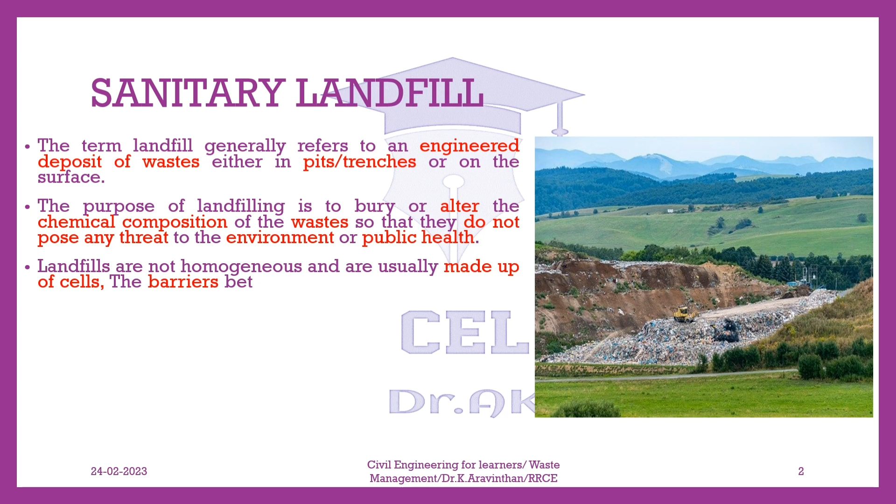Landfills are not homogeneous and are usually made up of cells. The barriers between cells generally consist of a layer of natural soil, clay, which restricts the downward or lateral escape of the waste constituents or leachate. Landfilling relies on containment rather than treatment for control of wastes. If properly executed, it is a safer and cheaper method than incineration.

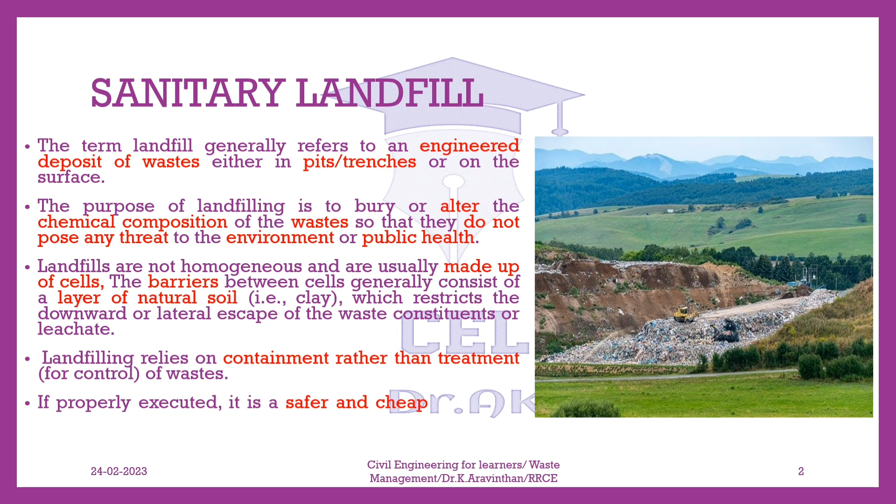The 4 minimum requirements for a sanitary landfill are: 1. Full or partial hydrological isolation. 2. Formal engineering preparation. 3. Permanent control. 4. Planned waste emplacement and covering.

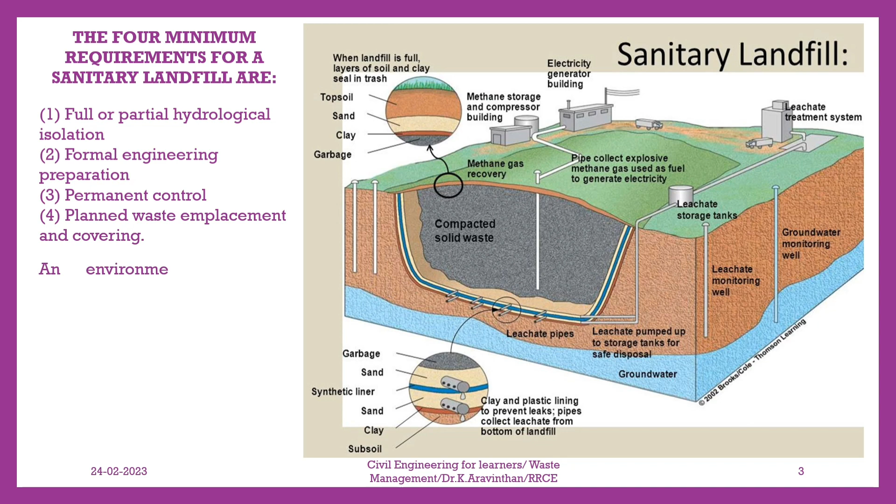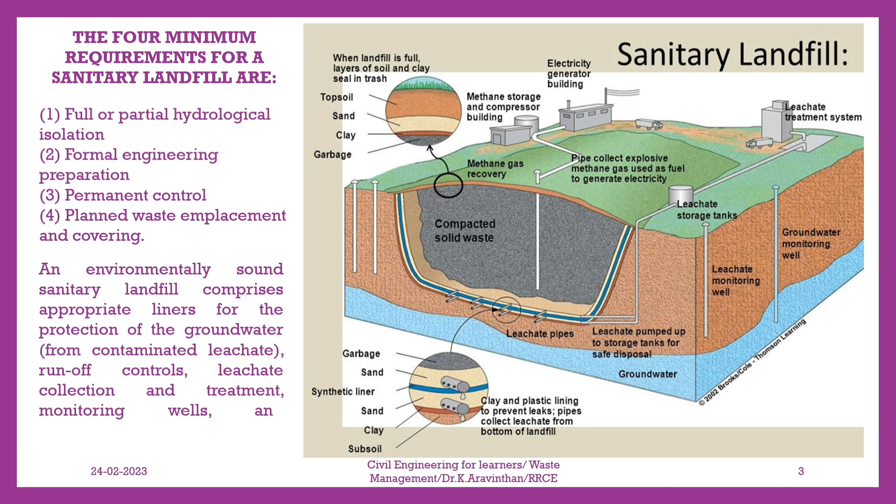An environmentally sound sanitary landfill comprises appropriate liners for the protection of the groundwater from contaminated leachate, runoff controls, leachate collection and treatment, monitoring wells, and appropriate final cover design.

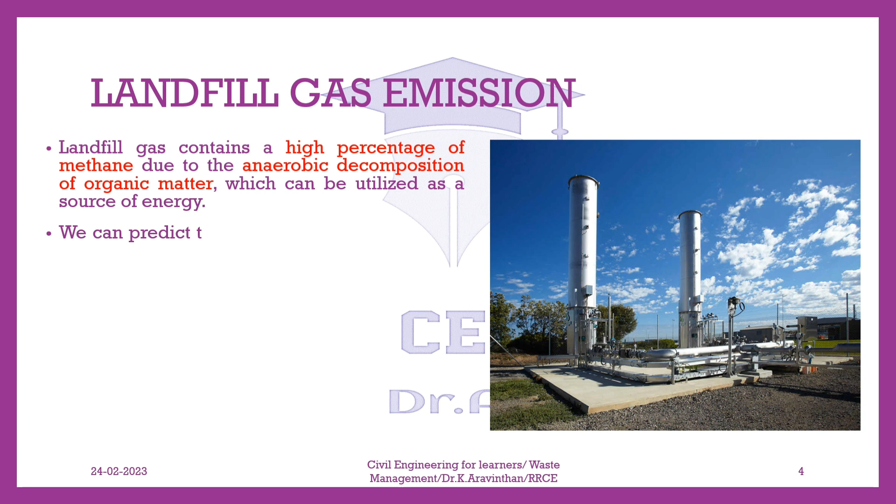Landfill gas emission. Landfill gas contains a high percentage of methane due to the anaerobic decomposition of organic matter, which can be utilized as a source of energy. We can predict the amount and composition of the gas generated for different substrates, depending on the general anaerobic decomposition of wastes added. Climatic and environmental conditions also influence the gas composition. Due to the heterogeneous nature of the landfill, some acid phase anaerobic decomposition occurs along with the methanogenic decomposition.

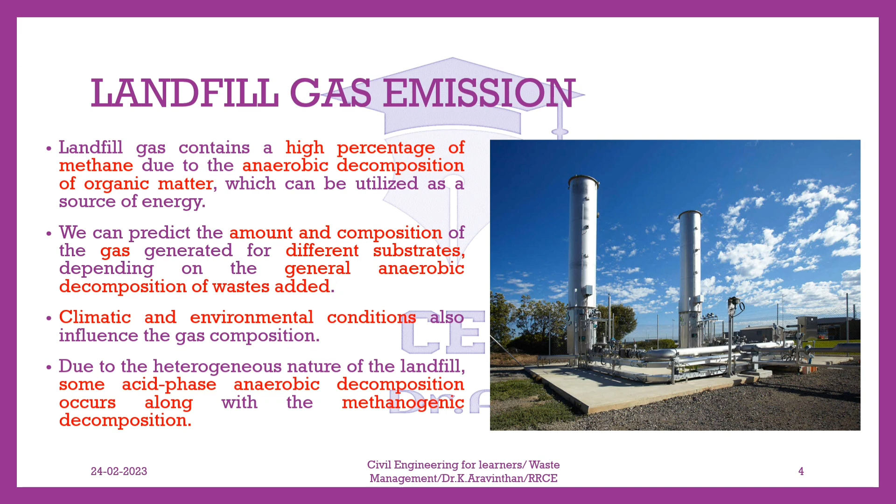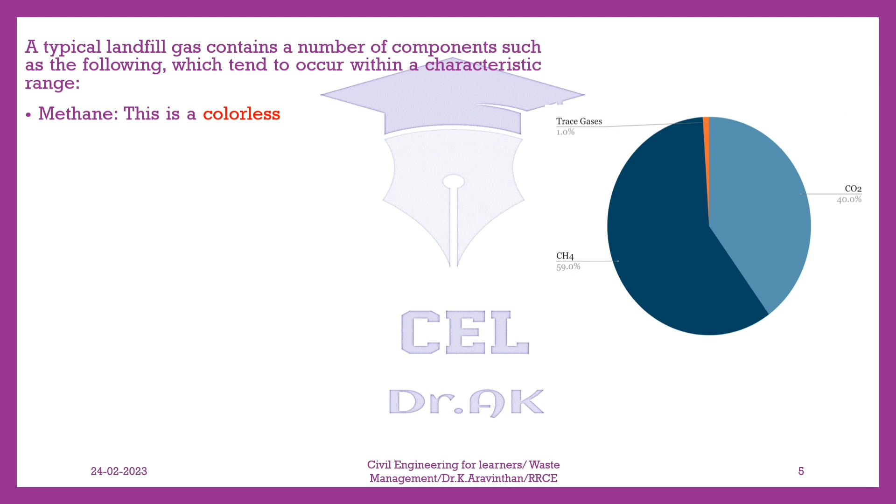A typical landfill gas contains a number of components such as the following, which tend to occur within a characteristic range. Methane. This is a colorless, odorless, and flammable gas with a density lighter than air, typically making up 50 to 60% of landfill gas. Carbon dioxide. This is a colorless, odorless, and non-inflammable gas that is denser than air, typically accounting for 30 to 40%.

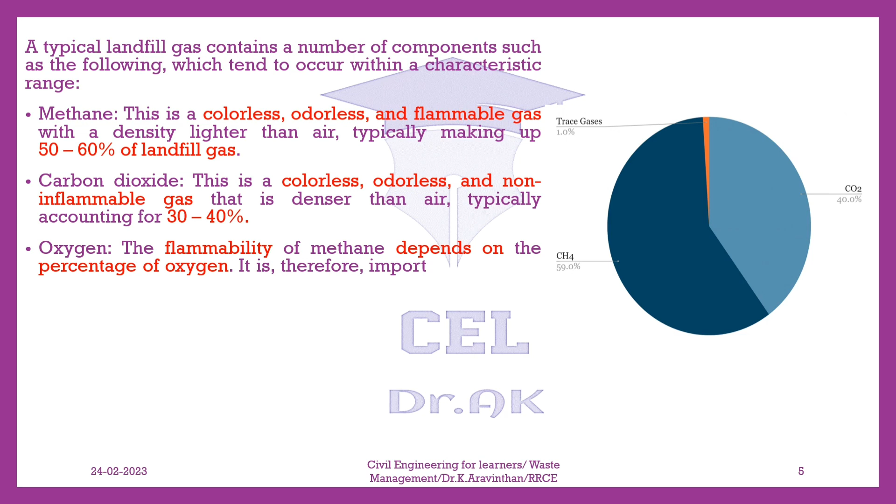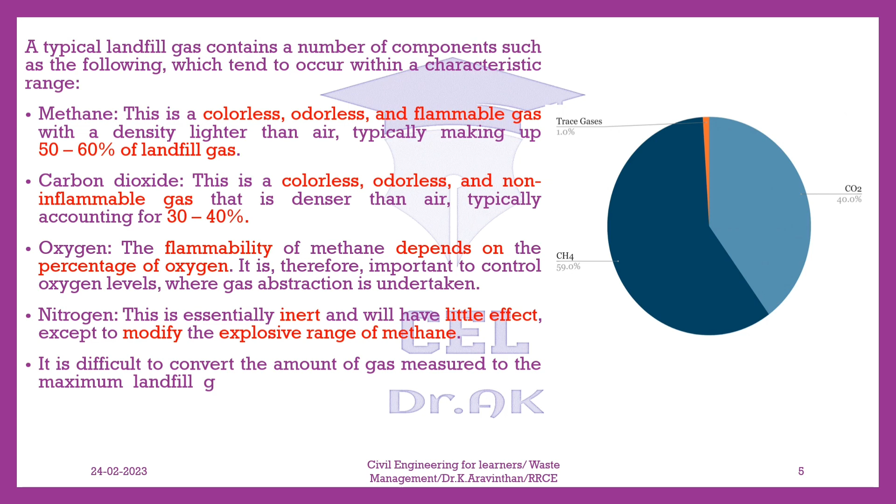Oxygen. The flammability of methane depends on the percentage of oxygen. It is, therefore, important to control oxygen levels where gas abstraction is undertaken. Nitrogen. This is essentially inert and will have little effect, except to modify the explosive range of methane. It is difficult to convert the amount of gas measured to the maximum landfill gas production value because gas is withdrawn from a small part of the landfill only, referred to as the zone of influence during measurement.

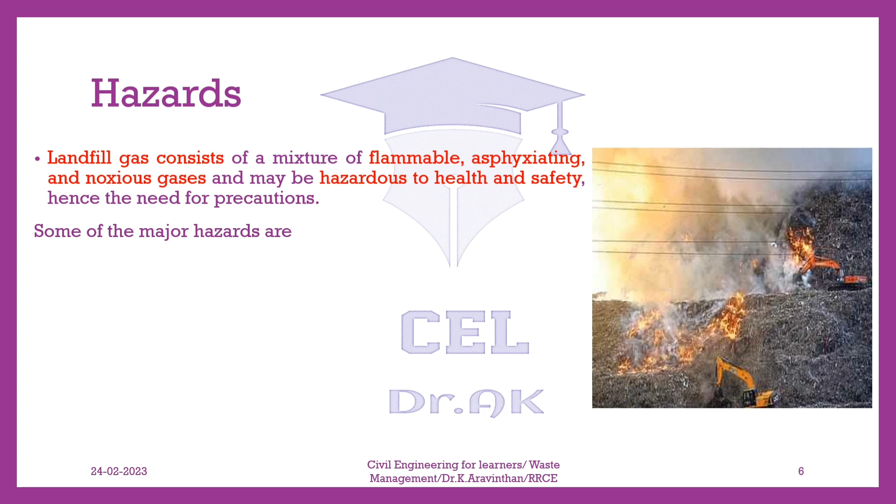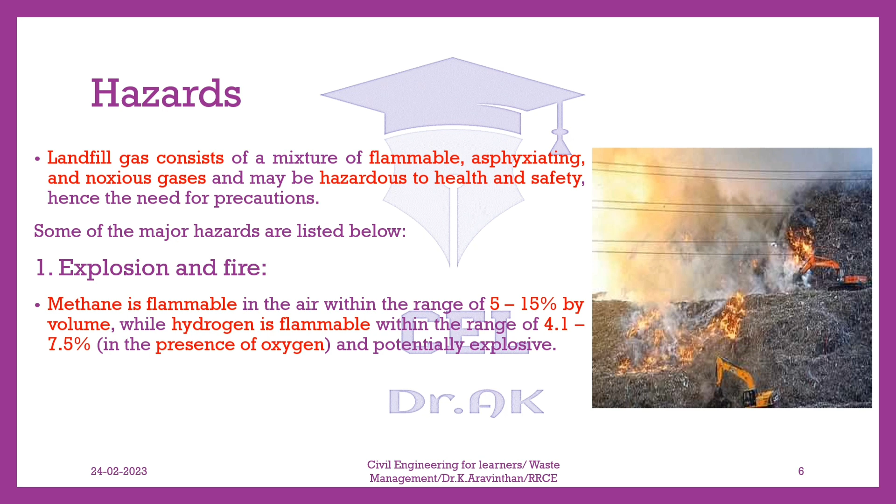Hazards. Landfill gas consists of a mixture of flammable, asphyxiating, and noxious gases and may be hazardous to health and safety, hence the need for precautions. Some of the major hazards are listed below. 1. Explosion and fire. Methane is flammable in the air within the range of 5 to 15% by volume, while hydrogen is flammable within the range of 4.1 to 7.5% in the presence of oxygen, and potentially explosive. Fire, occurring within the waste, can be difficult to extinguish and can lead to unpredictable and uncontrolled subsidence as well as the production of smoke and toxic fumes.

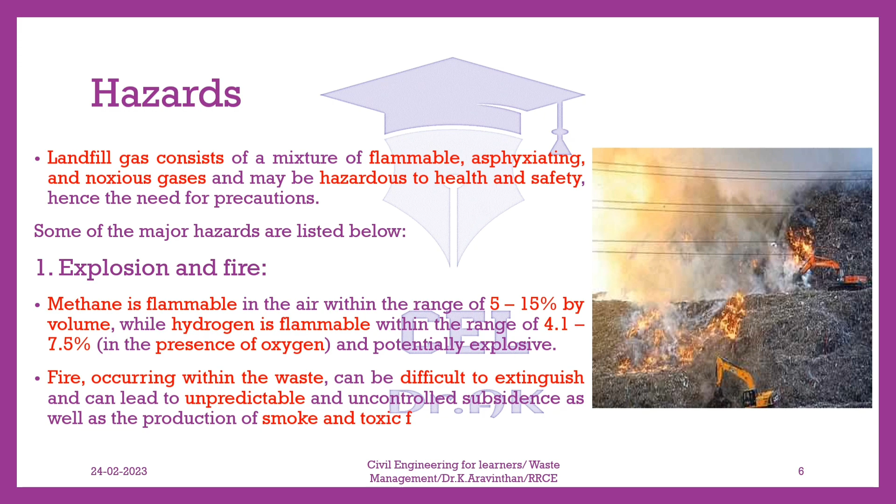2. Trace components. These comprise mostly alkanes and alkenes, and their oxidation products such as aldehydes, alcohols, and esters. Many of them are recognized as toxicants when present in the air at concentrations above occupational exposure standards. 3. Global warming. Known also as the greenhouse effect, it is the warming of the Earth's atmosphere by the accumulation of gases, methane, carbon dioxide, and chlorofluorocarbons, that absorb reflected solar radiation.

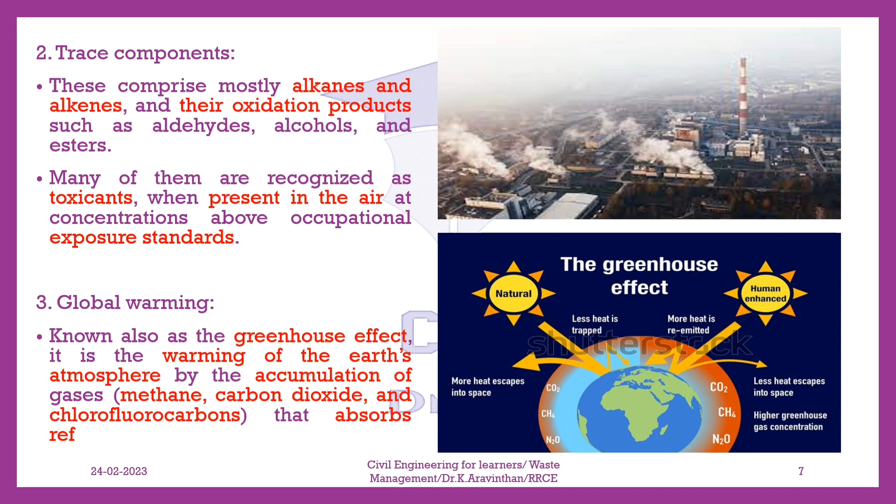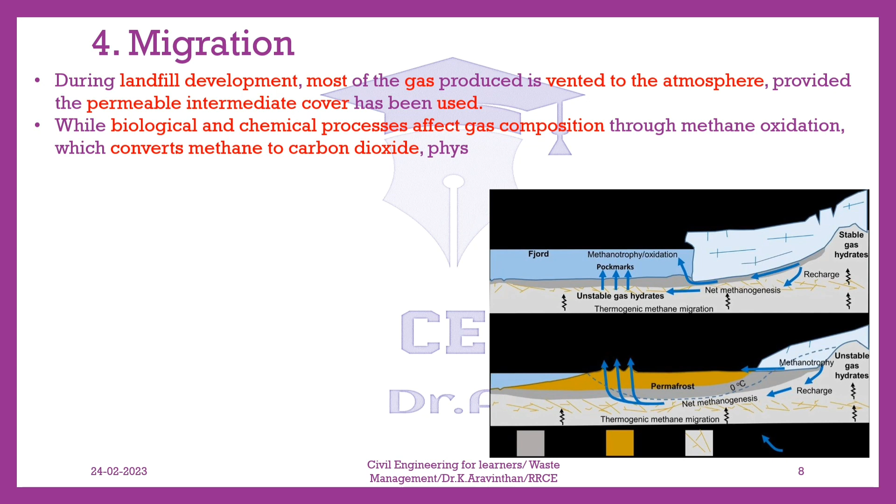4. Migration. During landfill development, most of the gas produced is vented to the atmosphere, provided the permeable intermediate cover has been used. While biological and chemical processes affect gas composition through methane oxidation, which converts methane to carbon dioxide, physical factors affect gas migration. The physical factors that affect gas migration include environmental conditions. These affect the rate of degradation and gas pressure buildup. Geophysical conditions. These affect migration pathways. In the presence of fractured geological strata or a mine shaft, the gas may travel large distances unless restricted by the water table. Climatic conditions, falling atmospheric pressure, rainfall, and water infiltration rate affect landfill gas migration.

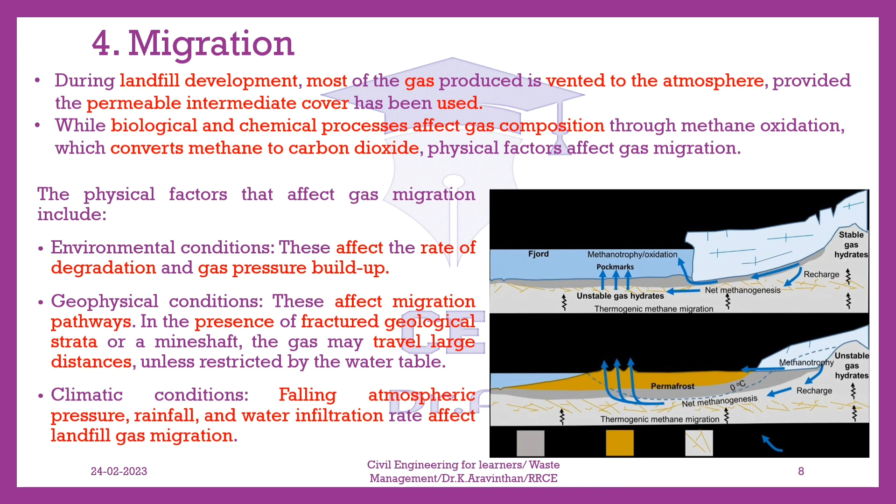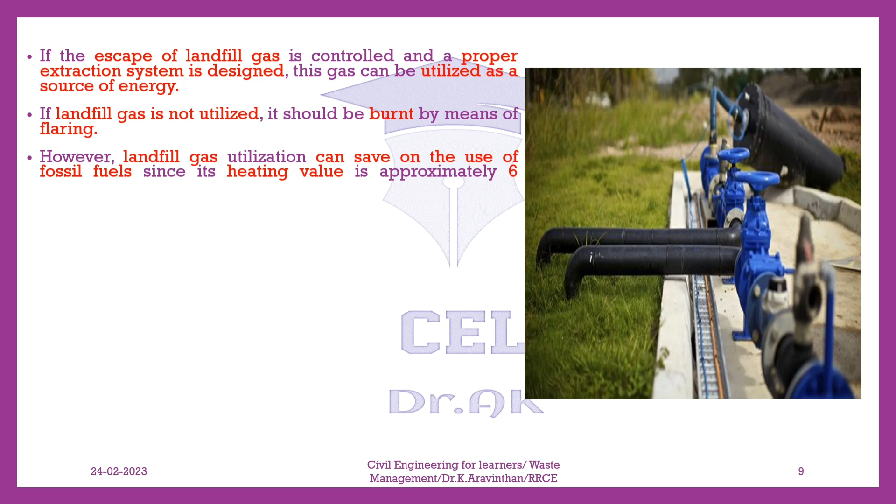If the escape of landfill gas is controlled and a proper extraction system is designed, this gas can be utilized as a source of energy. If landfill gas is not utilized, it should be burnt by means of flaring. However, landfill gas utilization can save on the use of fossil fuels since its heating value is approximately 6 kWh per cubic meter and can be utilized in internal combustion engines for the production of electricity and heat.

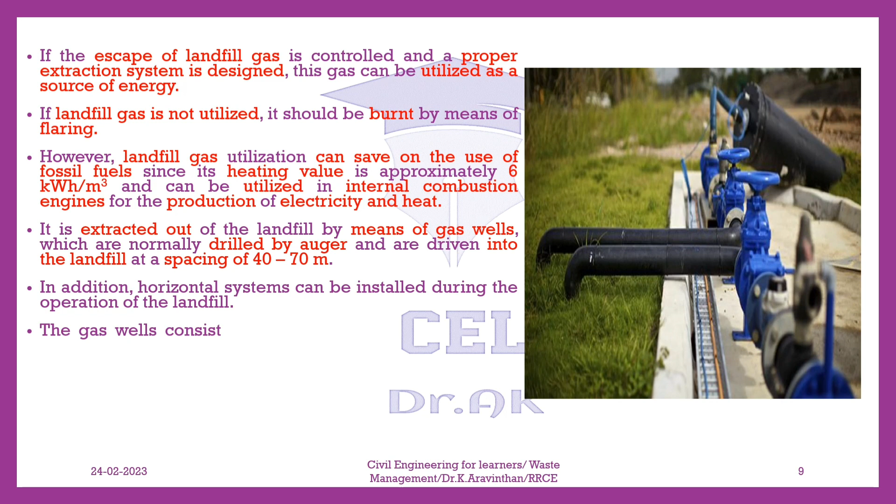It is extracted out of the landfill by means of gas wells, which are normally drilled by auger and are driven into the landfill at a spacing of 40 to 70 m. In addition, horizontal systems can be installed during the operation of the landfill. The gas wells consist mainly of perforated plastic pipes surrounded by coarse gravel and are connected with the gas transportation pipe with flexible tubing. The most important factors influencing the planning and construction of landfill gas extraction systems are the settling of waste, water tables in landfills, and gas quality.

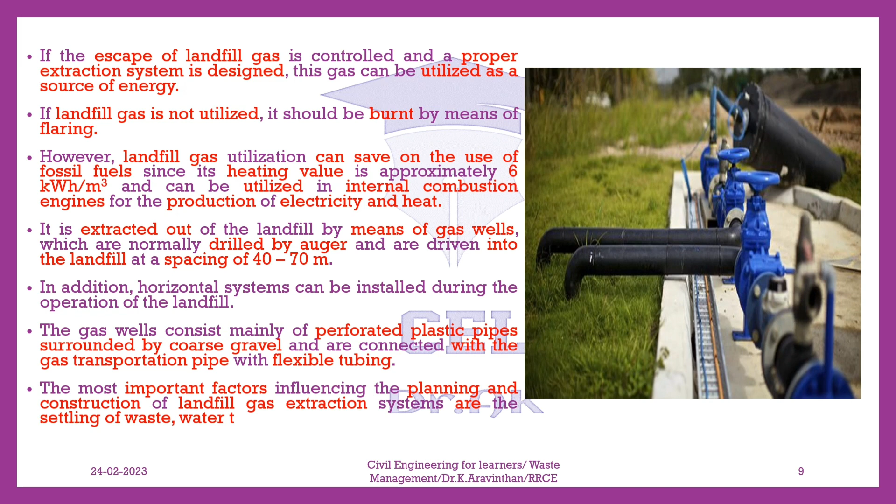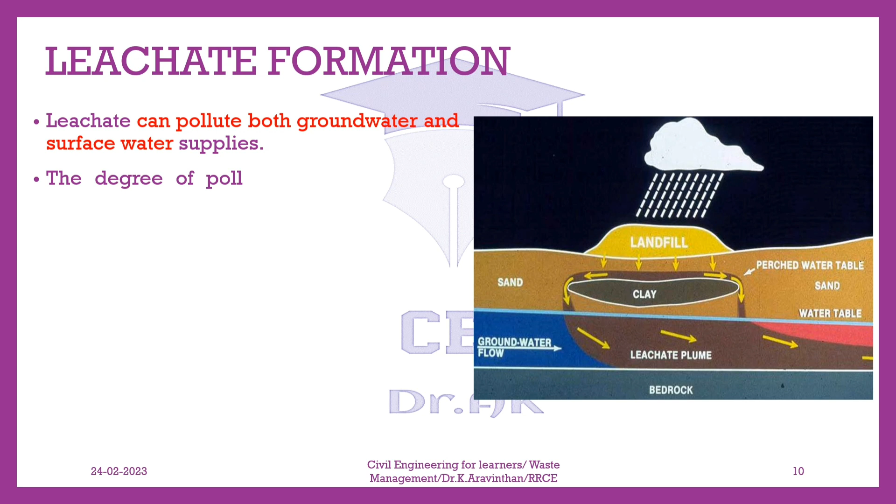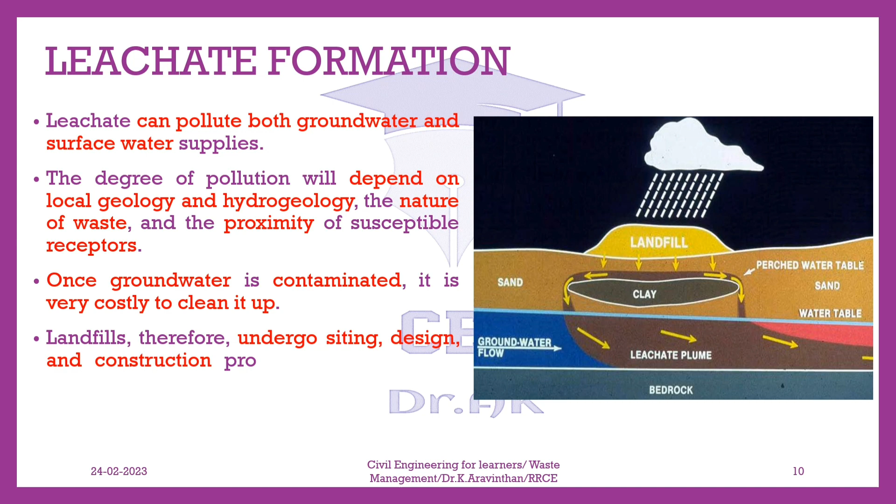Leachate formation. Leachate can pollute both groundwater and surface water supplies. The degree of pollution will depend on local geology and hydrogeology, the nature of waste, and the proximity of susceptible receptors. Once groundwater is contaminated, it is very costly to clean it up. Landfills, therefore, undergo siting, design, and construction procedures that control leachate migration.

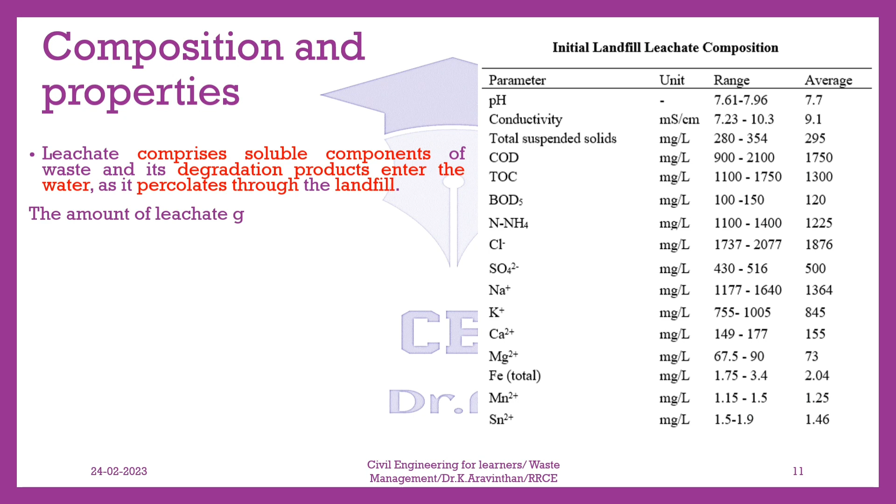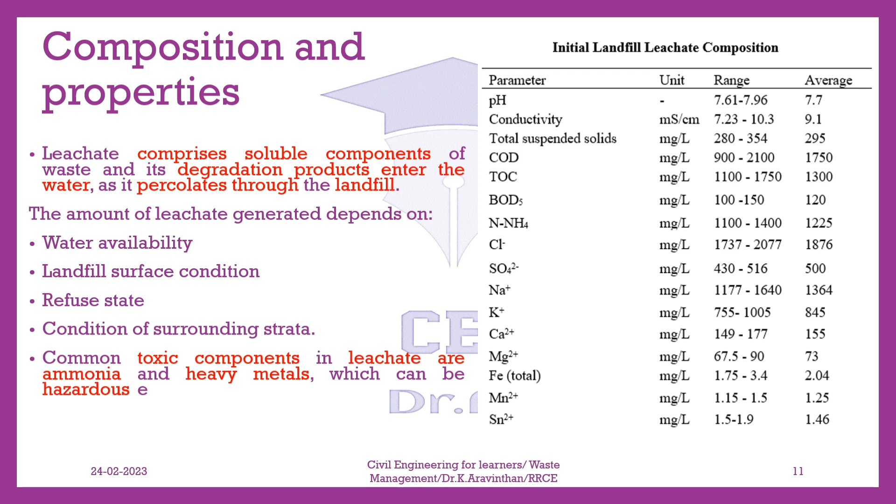Composition and properties. Leachate comprises soluble components of waste, and its degradation products enter the water as it percolates through the landfill. The amount of leachate generated depends on water availability, landfill surface condition, refuse state, and condition of surrounding strata. Common toxic components in leachate are ammonia and heavy metals, which can be hazardous even at low levels if they accumulate in the food chain.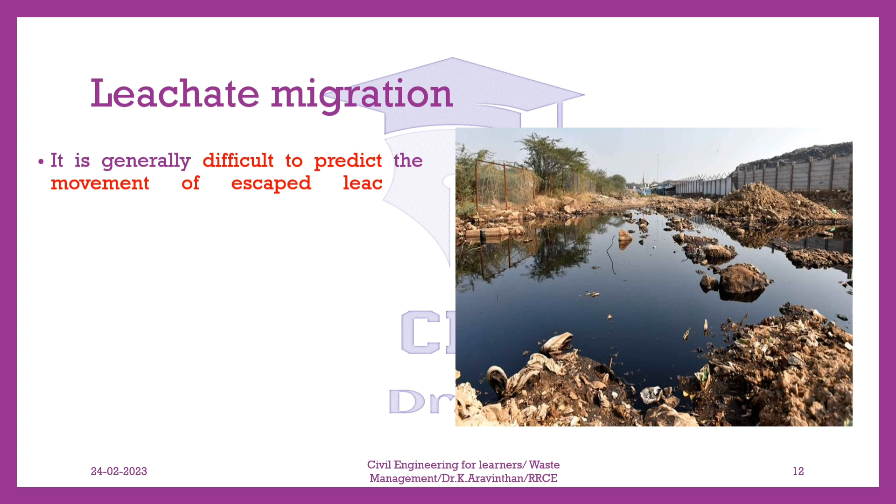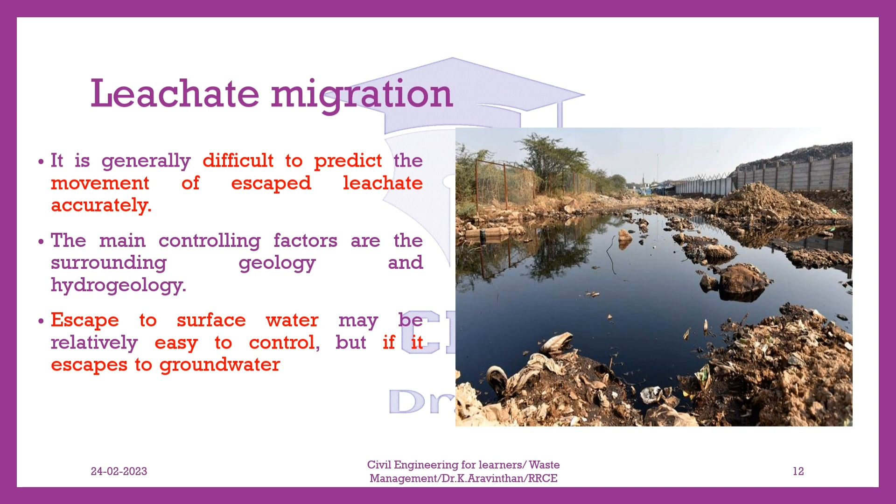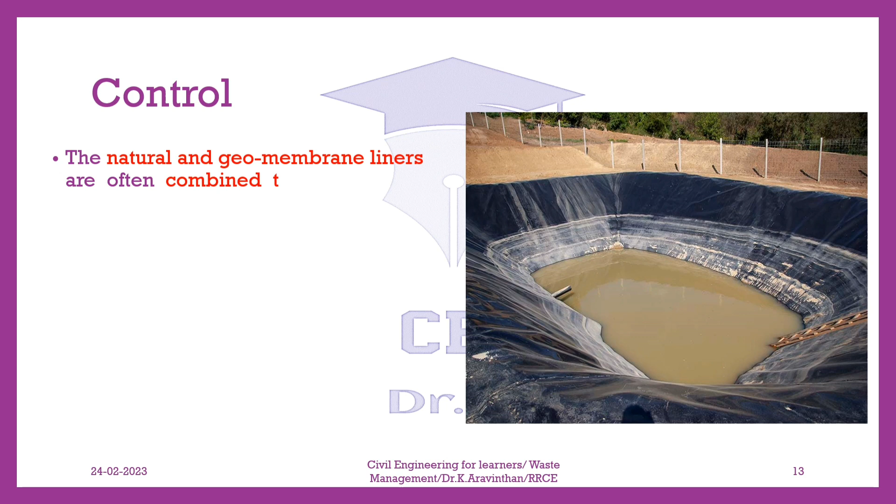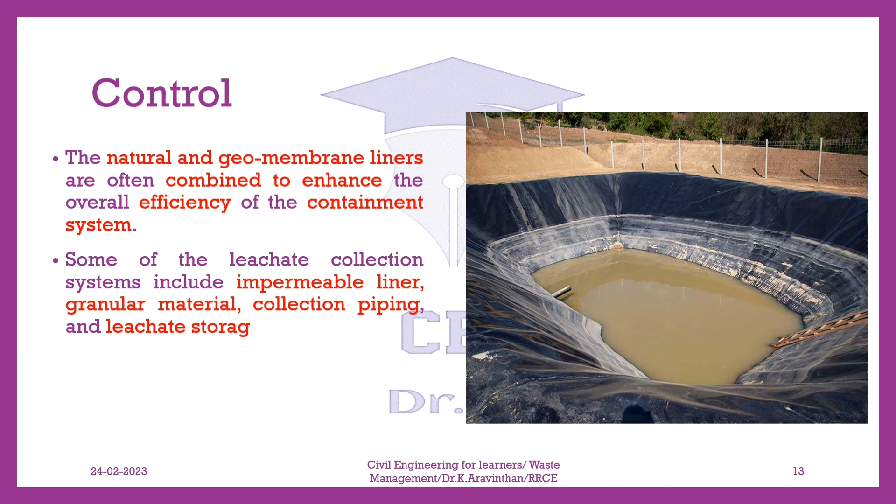Leachate migration. It is generally difficult to predict the movement of escaped leachate accurately. The main controlling factors are the surrounding geology and hydrogeology. Escape to surface water may be relatively easy to control, but if it escapes to groundwater sources, it can be very difficult both to control and clean up. Control. The natural and geomembrane liners are often combined to enhance the overall efficiency of the containment system. Some of the leachate collection systems include impermeable liner, granular material, collection piping, and leachate storage tank. Leachate is trucked to a wastewater treatment facility.

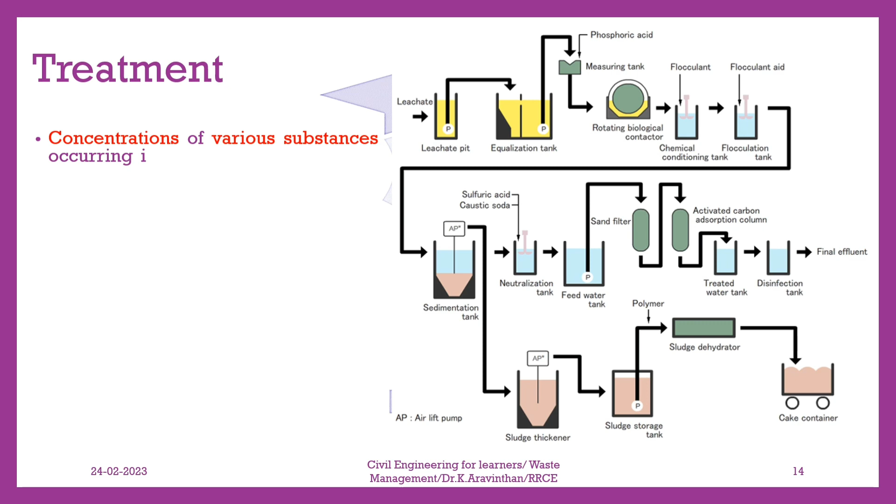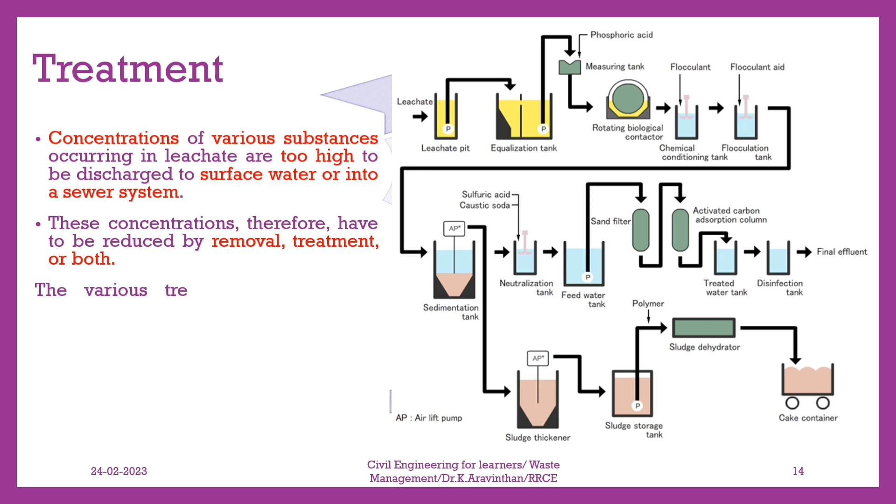Treatment. Concentrations of various substances occurring in leachate are too high to be discharged to surface water or into a sewer system. These concentrations, therefore, have to be reduced by removal, treatment, or both. The various treatments of leachate include leachate recirculation, biological treatment, and physicochemical treatment.